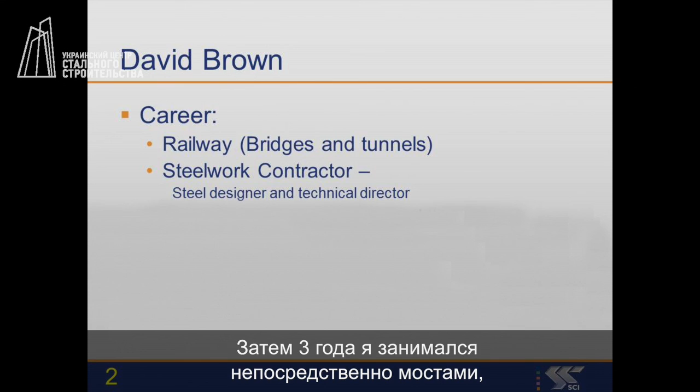So I started my career working for the National Railway Organisation in the UK. I designed a number of things, and then I spent 3 years on site working on bridges. After I worked on bridges for 3 years, I then looked after tunnels for a little while.

And then I met a man on a train, and he said he knew of a steelwork fabricator, and they wanted a design engineer. The steelwork fabricator was in a very horrible part of the United Kingdom. And I said, there is no way that I'm going to work in the steel industry, and there is no way that I'm going to work in this horrible part of the United Kingdom.

But then I thought, perhaps I'm being too hasty, so I went for the interview. When the managing director said, how much do you earn? I increased my salary, and he offered me even more. And then he said that we also give you a company car, and we also give you free petrol. So I left the railway and I joined a steel fabricator.

It was a very small company, and there was only me, so I did all the design, all the structural design, all the connection design. Then after 3 years, I was promoted to be their technical director, but there was still only me. So I did all the design, I did all the connection design. I did get a larger car.

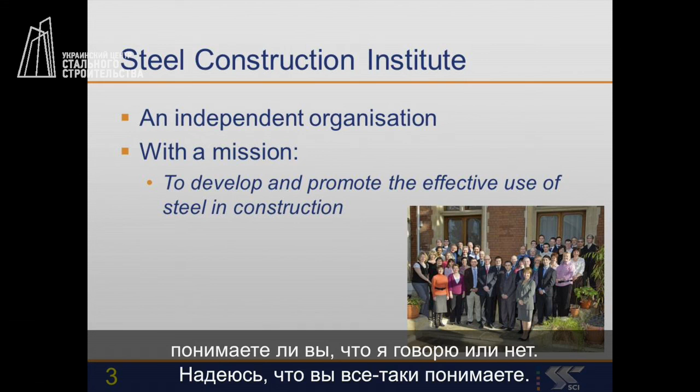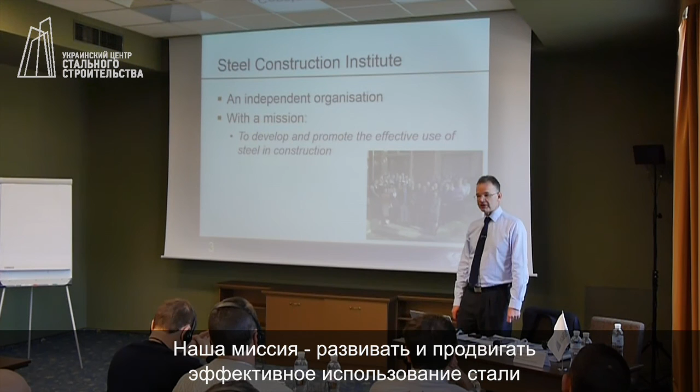There are about 30 people who work at the Steel Construction Institute. We have a mission to develop and promote the proper and effective use of steel in construction. So we write design guides, we train people, we answer their questions.

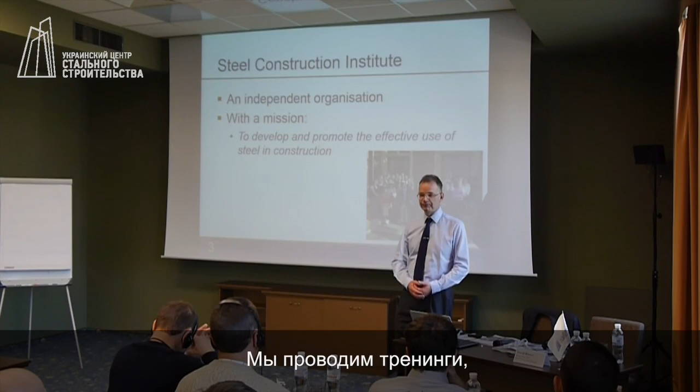We are an independent company, so we are not for profit. We don't try and make a profit, but we very definitely try and avoid a loss.

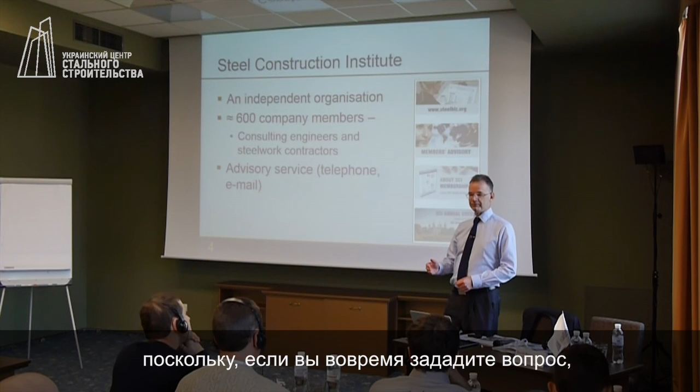We have around 600 members, and most of our members would be design engineers or steelwork fabricators. I think most people join us because of the publications they receive, but also because of the advisory service. When people have problems or questions, we help them out. People find that very valuable, because if you can avoid a problem, you might avoid a very expensive mistake later on.

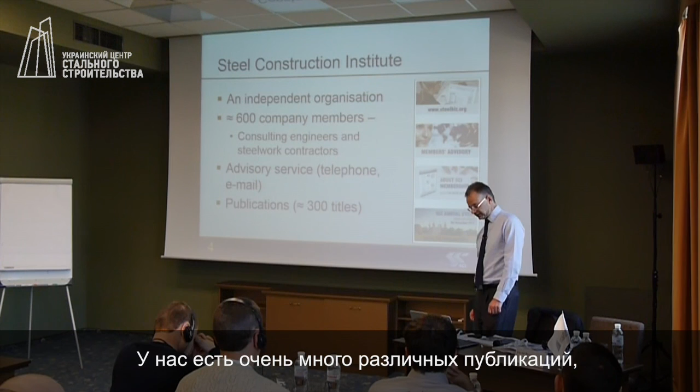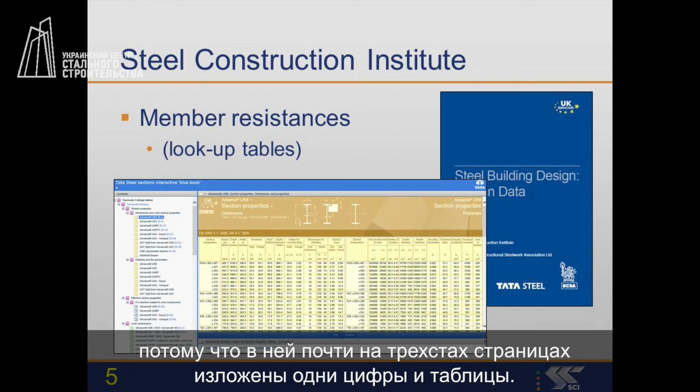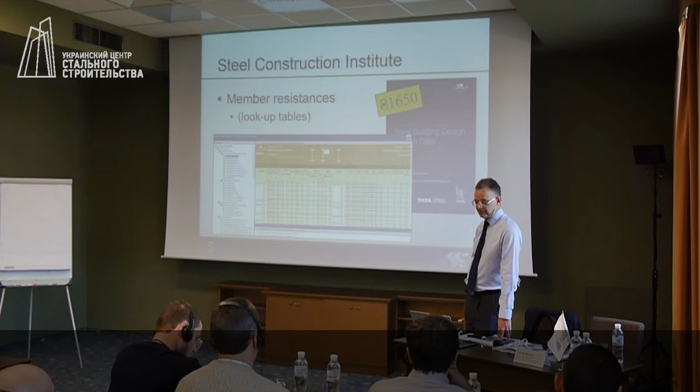We have lots and lots of publications, around about 300. Our best-selling book is what we call, for obvious reasons, the Blue Book. The Blue Book is really boring, approximately 300 pages, and it contains numbers, and even more numbers. These are lookup tables of member resistances, which is easy for us because we're using rolled sections, so standard sections. It's also our most expensive publication, and many people in the UK would have this particular publication. I feel slightly sorry for them because it's a really boring book.

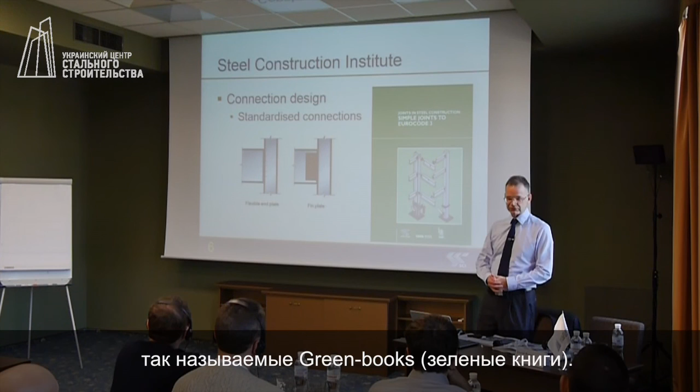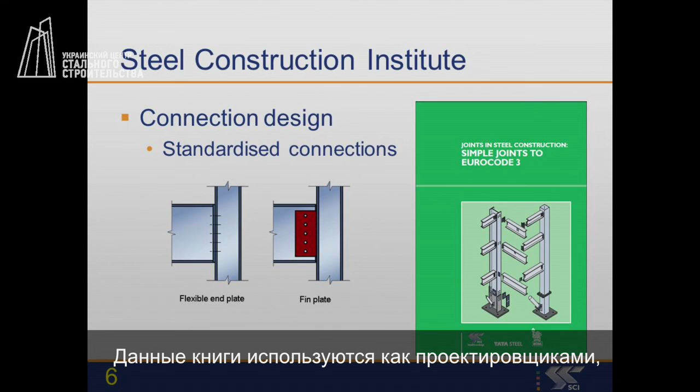We also do books on connections. Here is a picture of one of our green books, so nominally pinned connections in this case, end plates or fin plates. These would be used by practicing engineers, and also by steelwork fabricators.

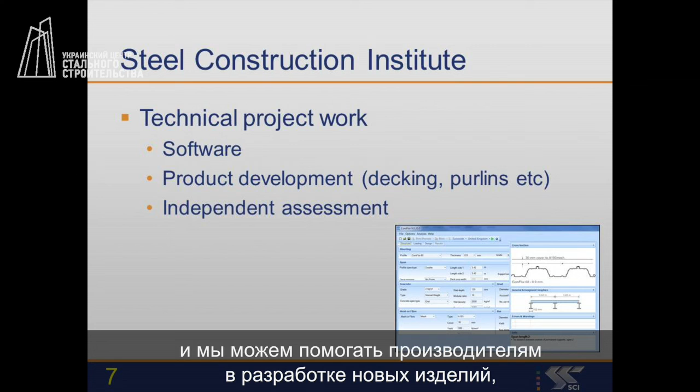We also do a lot of project work for different clients. So we write software, we might help manufacturers develop a new product, and we add a quality mark to some products.

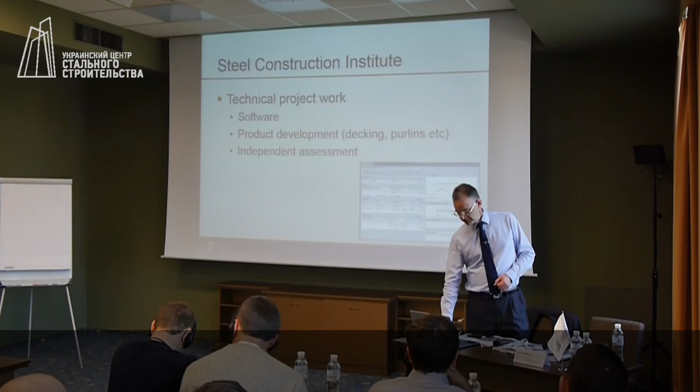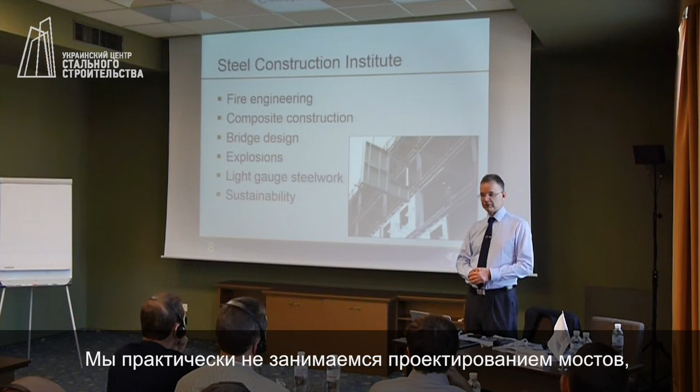These are some more areas where we work. Fire engineering, and I know fire engineering is important in Ukraine. Composite construction, so composite floors, would be the standard solution in the United Kingdom, so a lot of our work is to do with composite floors. We don't do much on bridge construction because there are not many new bridges in the UK. The UK is a small country, we don't have many new railways, we don't have many new major roads.

We deal a lot with explosions, and that would concern explosions really on offshore oil production platforms, which is a real hazard in that sort of environment.

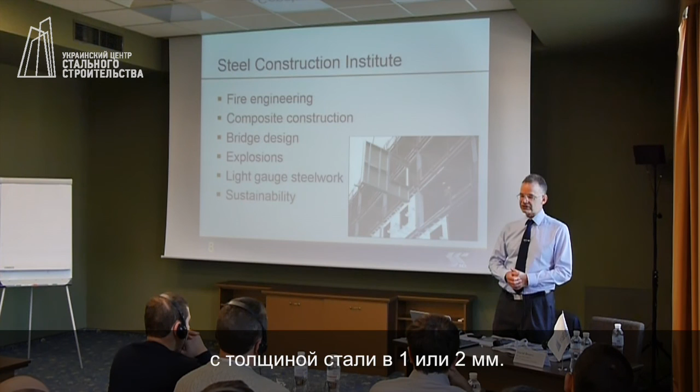We do a lot with light gauge steelwork. So light gauge steelwork would be 1 millimetre or 2 millimetres thick. It is very much a growing area in the United Kingdom, so maybe panels, as you see here, or maybe complete structures.

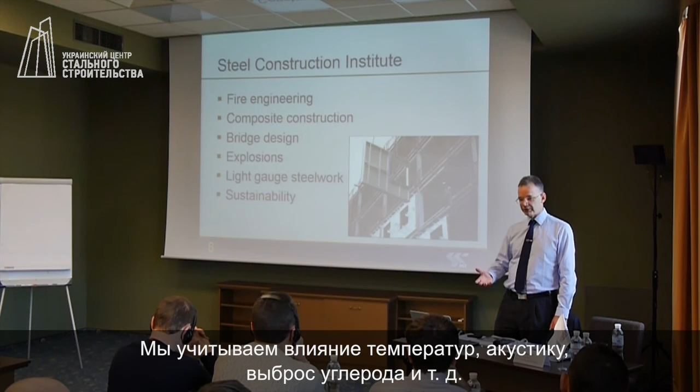And we do a fair amount in sustainability, so thermal performance, carbon, acoustics, those sorts of issues. So that's the SCI. Here then we're moving on to my technical area today, so a little bit of background on the Eurocodes.

So the Eurocodes then, the ambition was to have a set of design standards which could be used across Europe, across the entirety of Europe. And in the UK there has been a lot of resistance to the Eurocodes, because in the UK people would prefer to continue to design to their own standard. And they will ask me, what is the advantage of designing to the Eurocodes?

Are steel structures lighter? But the answer is that the Eurocodes were not developed in order to improve the technology. They were a political development so that one could trade entirely across Europe. I think that there are some improvements in technology, and I will try and demonstrate those to you later on.

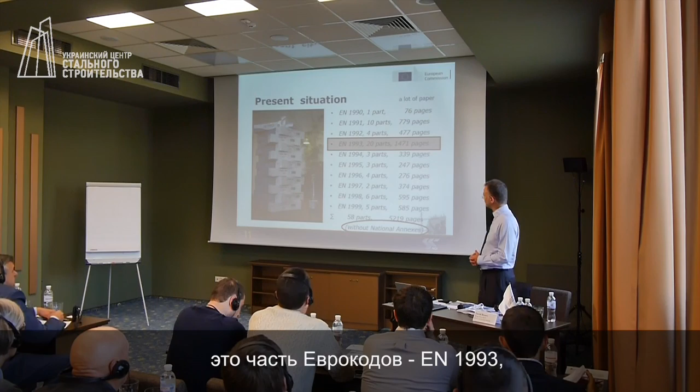One problem with the Eurocodes is that there are so many documents. Here is a slide which a European colleague put together, and you'll see down at the bottom here, 5,200 pages, which is huge. In the steel world, you will notice that the steel parts, EN 1993, are the largest contribution to the Eurocodes, with nearly 1,500 pages. So if you wanted all the Eurocodes, this is a large number of documents, and I would imagine it will be expensive. That's one of the problems that we face in the United Kingdom.

The second issue is that these pages are before you've got the national annex. So in addition to the Eurocode, every one of these parts, and you'll see that there are 58 identified there, they will all have a national annex.

Why do we need a national annex? Well, because the goal of a common design standard across the whole of Europe was not achieved.

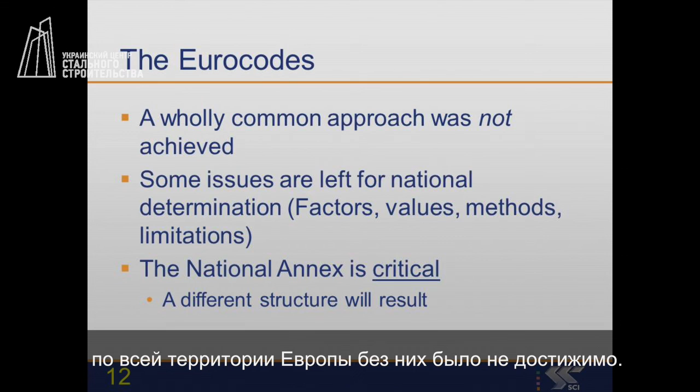The problem is, of course, that people in the United Kingdom think we know steel design, and we think we know it better than anybody else in the whole world. Unfortunately, people from Germany think they know steel design as well. They are wrong, of course.

But when there is a difference of opinion, what do you do? You debate for 30 years. Then you must decide: perhaps leave the issue out altogether and say nothing about it in the Eurocode, or perhaps make it a matter for national decision. And if it is a matter for national decision, then it will be part of the national annex.

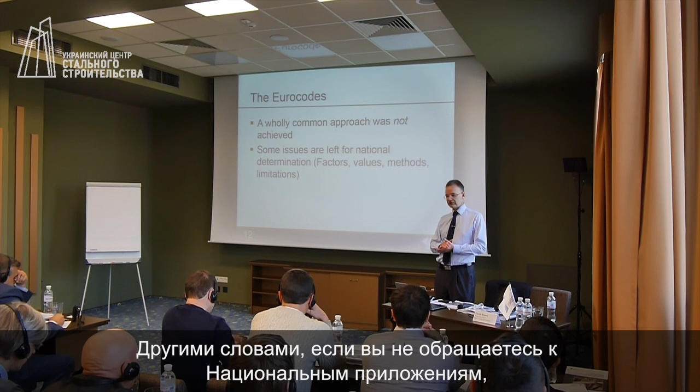So the national annex is really, really important, because it contains the things which a country feels very strongly about. If you do not pay attention to the national annex, you are in serious danger of making a huge mistake. I will try to emphasize that again a little bit later on.

In theory, the national annex is always to be made available in the language of the country, and in theory it's also to be made available in English. So you are supposed to be able to get the national annex for any particular country at least in English. I don't think that has been achieved throughout Europe.

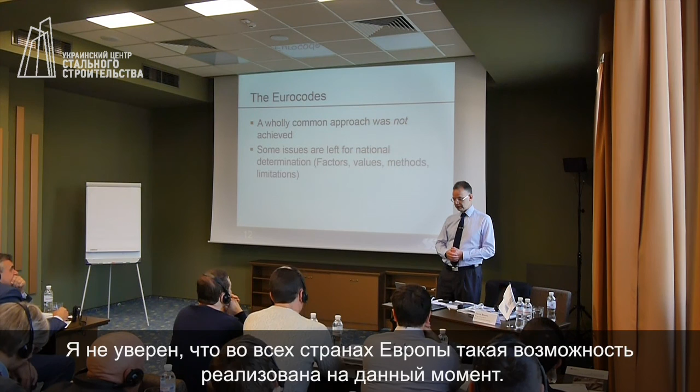You need to be aware of the national annex for the country where the structure is going to be built. For example, there would be nothing to stop you in Ukraine designing a structure to be built in the United Kingdom or in France. But if it was going to be built in the UK, you would need the UK national annex. So it's where the structure is to be built, not where you're designing.

So if you design to the Eurocodes, but in different countries, certainly a different structure will be the result, because some people feel very strongly about certain issues in the Eurocodes.

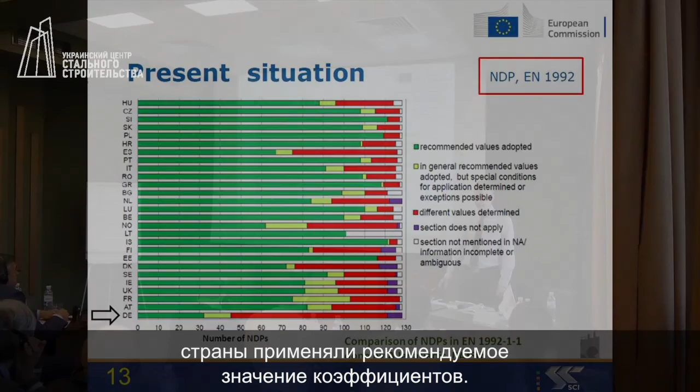This little chart, on the top right as you look, actually concerns the concrete code, not the steel code. But it gives you an idea of how some countries adopt the recommended values and how some countries change a lot. On this chart, green on the left-hand side represents where countries have accepted the recommended values in the Eurocodes, and red means a country has changed the recommended values. So the more red you see, the more changes there are in the national annex.

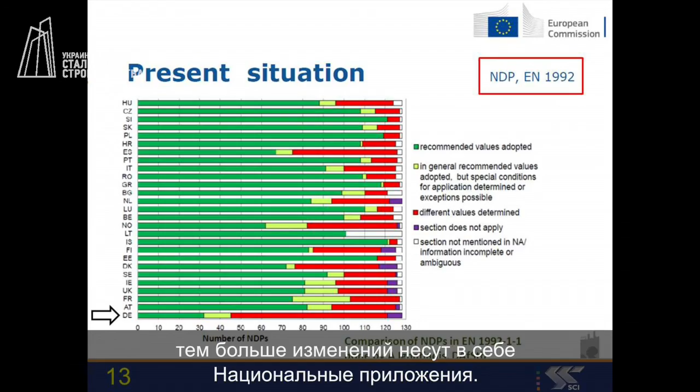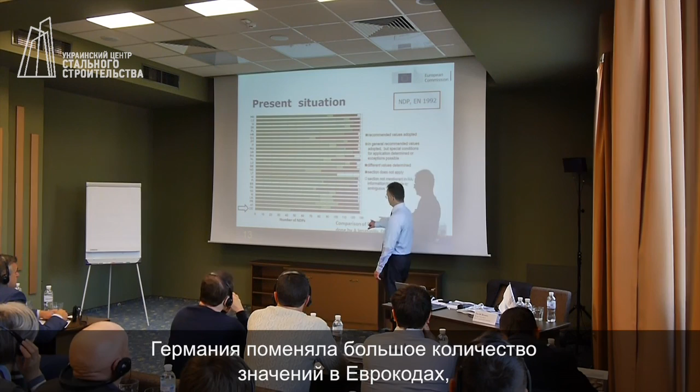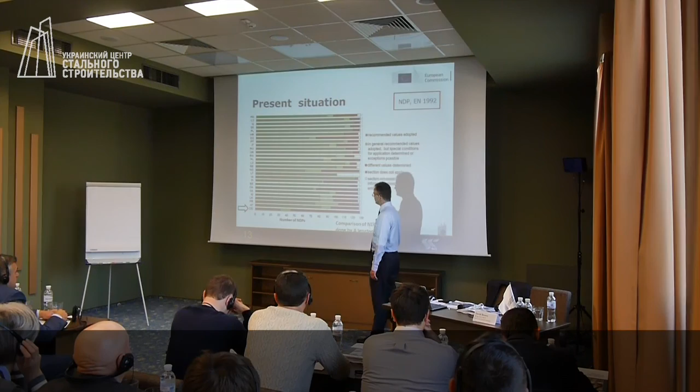Maybe not so much of a surprise, the bottom row there is Germany. Germany have changed an awful lot because they feel they know about steel construction. They are wrong, of course. The United Kingdom is here, so we think we know about steel construction too. I think this is Lithuania, and they seem to have accepted most of the recommended values. So it does change from country to country.

I received from the Steel Construction Centre here some of the Ukrainian national annexes, and I've had a look through them. In many places, it would appear that your national annex accepts the recommended values. In some places there are differences, and we'll look at some of those later on. But in many cases, important factors in the Eurocodes are accepted in the Ukraine national annex.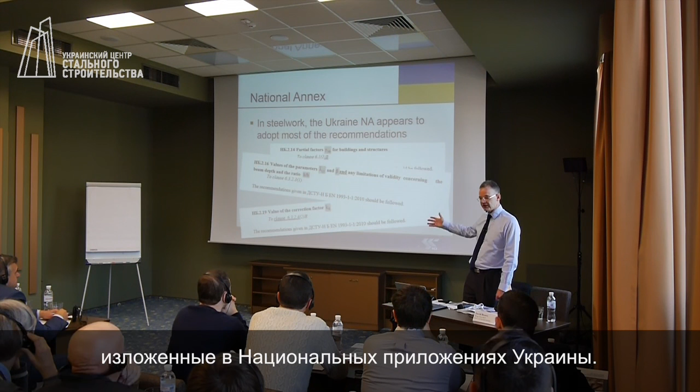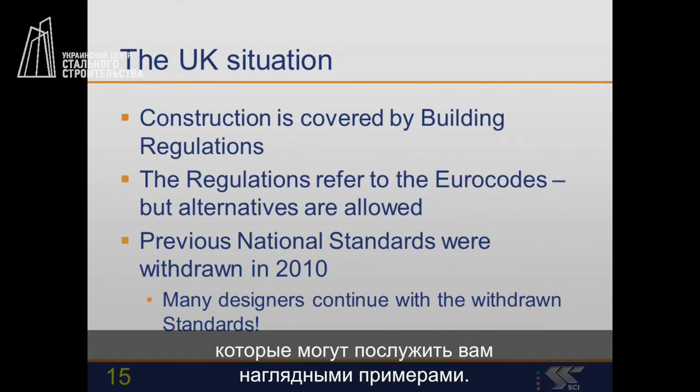Now, I don't wish to talk too much about the situation in the United Kingdom, and I will try to limit myself to situations where examples will help. In the United Kingdom, we are governed by something called the building regulations, and the building regulations do refer to the Eurocodes. But the regulations make it clear that design to the Eurocodes is only one way to satisfy the regulations.

In the United Kingdom, we could use the Spanish design standard, we could use the German design standard, we could use no design standard at all. So there is no obligation to actually design to the Eurocodes.

We do have a problem because our previous national standards were withdrawn 4 years ago now, so they are no longer available in the United Kingdom, and yet many people still use the previous national standards because they are allowed to under our building regulations. I think that will continue for many, many years.

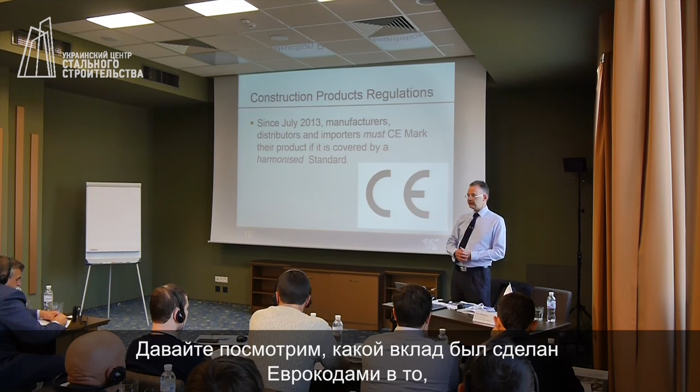One contribution to the Eurocodes is something called CE marking. CE marking is a quality stamp, effectively.

Materials must be CE marked, and fabricated steelwork must be CE marked. So anything which is placed on the market in Europe must be CE marked. Plate and sections provided by manufacturers will be CE marked, and certainly from summer of this year, fabricated steelwork must be CE marked.

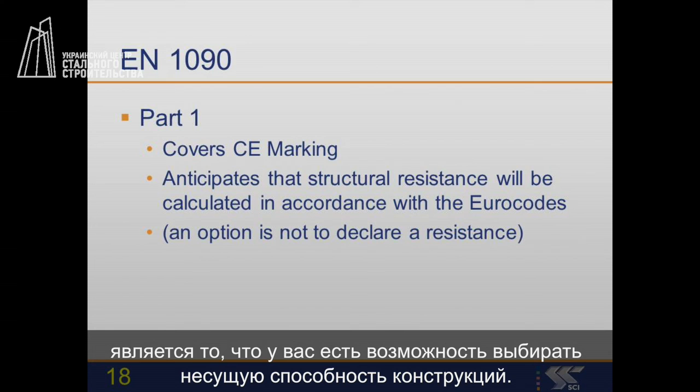CE marking is covered by European Standard 1090, and one of the options within that standard is that you can declare a design resistance. That means you will be saying a piece of steel is capable of carrying a certain number of kilonewtons.

If you do declare a design resistance, then 1090 is recommending that you calculate that resistance in accordance with the Eurocodes. So that means that if anybody is interested in CE marking, they will also be interested in design to the Eurocodes. Part 2 of that standard covers things like tolerances, workmanship.

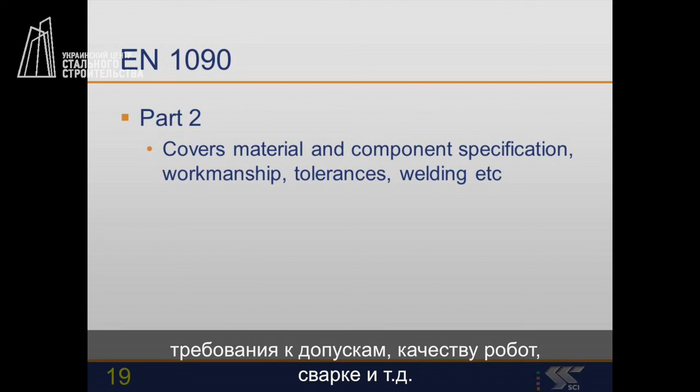In the UK, design to the Eurocodes is becoming more common. I think about 40% of designs in the UK will now be to the Eurocodes. Most of the larger steel designers, the large design practices, a famous name is Arup, an international practice, they will be designing to the Eurocodes. Many of the smaller practices will still continue with the previous national standards.

I think the change is happening because our national standards have been withdrawn. I think it's encouraged by CE marking, and encouraged because there is the option of a wider market. So in the UK, we could design buildings to be constructed in France or Germany or somewhere else in Europe.

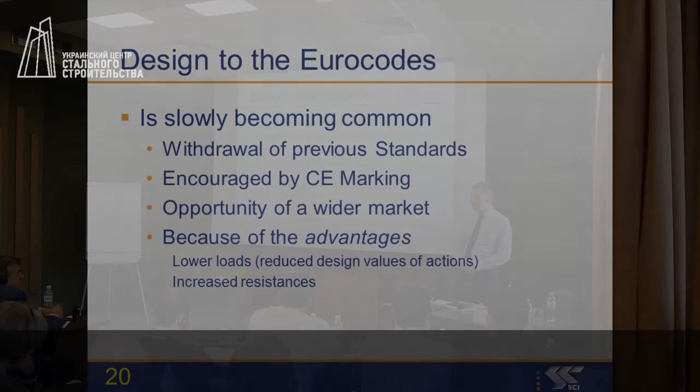Perhaps people are adopting the Eurocodes because of the advantages. So even though it was a political decision, I do think there are some advantages in designing to the Eurocodes. This may not be the same in Ukraine, but in the United Kingdom, we would be designing for lower loads, and therefore we could produce a more economical steel structure. Not only would we enjoy lower loads, we would also enjoy increased resistances. So the two, lower loads and increased resistances, make the Eurocodes very attractive for us in the UK.

Okay, let's move now to our technical subject, really, steel design. So a little bit of background.

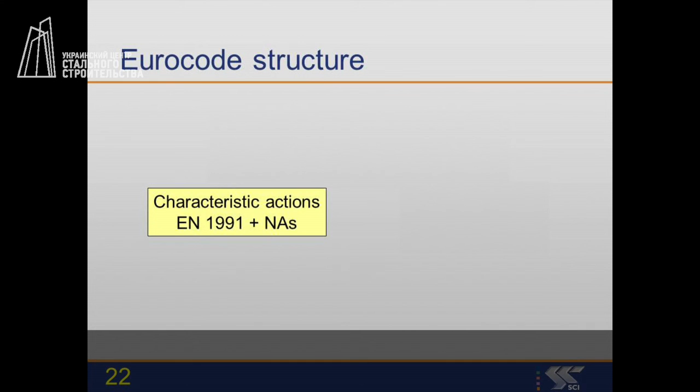This is a demonstration of the Eurocode structure. We have characteristic actions. I would have called those, in the UK, loads, but the Eurocode term is actions. They will come from somewhere in the 1991 suite of Eurocodes. There are a number of Eurocodes that all begin 1991. They cover things like snow and wind and loads on floors.

But notice, most importantly, you cannot look at these Eurocodes without the national annex, because the national annex is likely to change values, is likely to give you wind loads, for example, in your country. So you definitely need to look at the national annex.

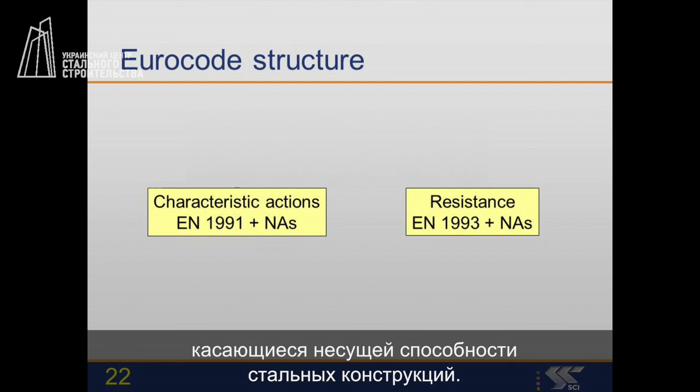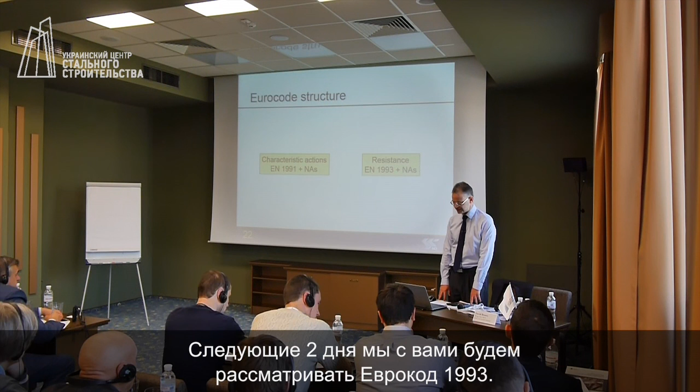And entirely separate to the actions is the resistance. For the next two days, we will be looking at Eurocode 3, or Eurocode 1993. But notice again, really importantly, we will always need to be looking at the national annex, because that will change country by country. And then those are brought together by a Eurocode called EN 1990.

And again, it involves the national annex. Your national annex has things to say about the content of EN 1990.

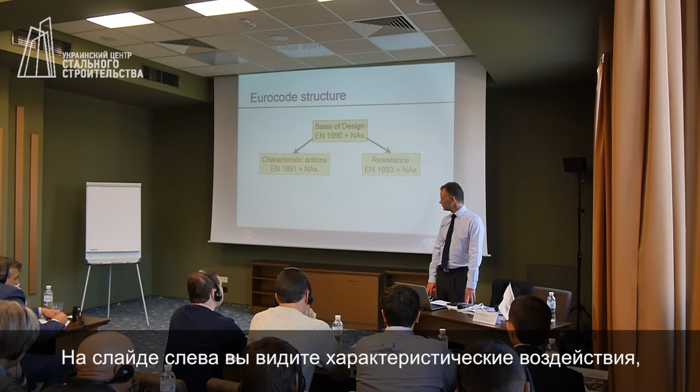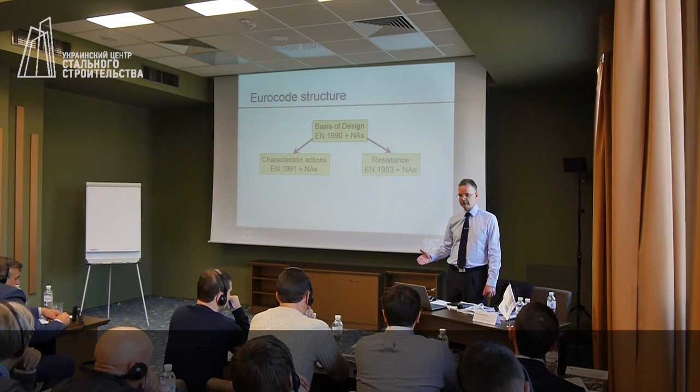So over on the left-hand side, a characteristic action will be typically something that happens once every 50 years. But when we compare that with a resistance, we want a factored action, or maybe you would know it as an ultimate load. So we need to combine the actions to create ultimate loads.

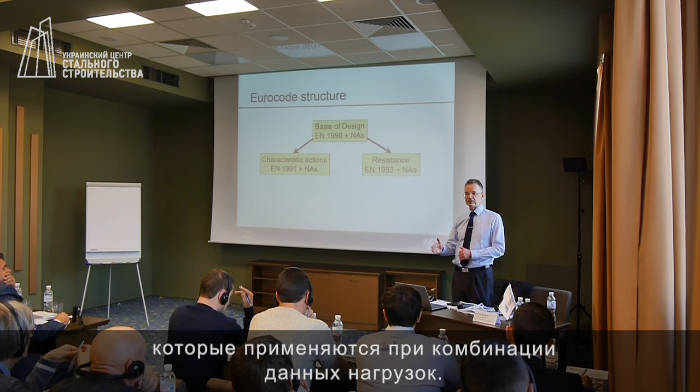And we find in Eurocode 1990 the factors that we apply to the characteristic actions. So 1990 is going to be a really important code for us, because it takes characteristic actions and then allows us to compare with our calculated resistance.

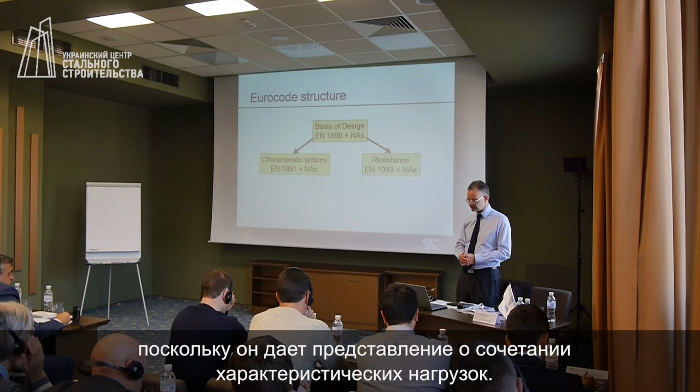These are the parts of 1991 that I think you will need most often. So the ones in bold type, I think, are the ones that you would use most of the time.

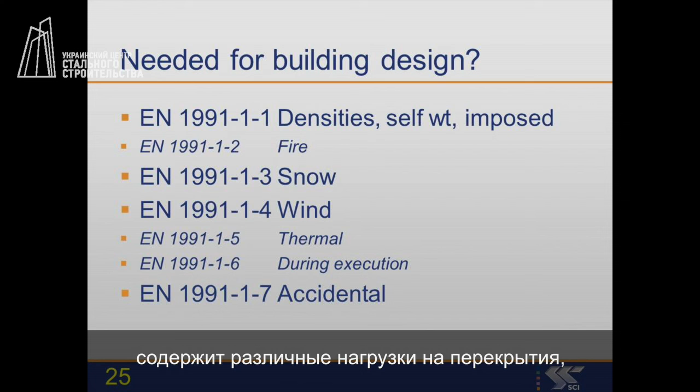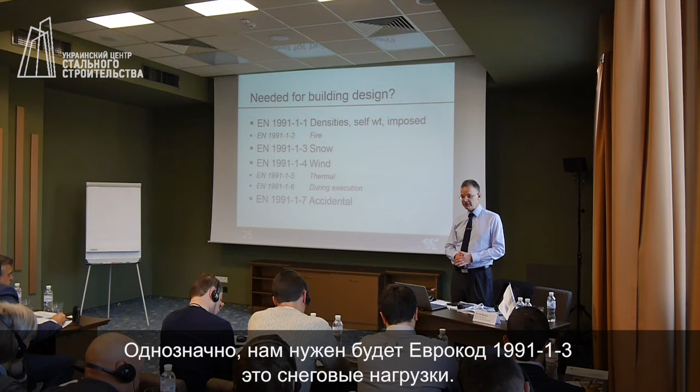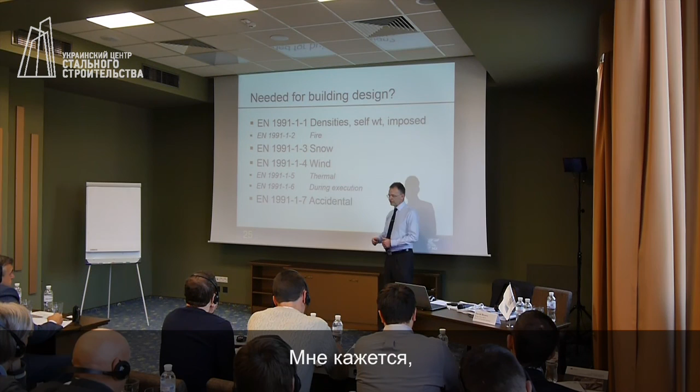1991-1-1, that's the top line. That will cover things like imposed loads on floors and imposed loads on roofs, so for sure we will need that. For sure we will need 1991-1-3, which covers snow. For sure we will need 1991-1-4, which covers wind. And I think you will need 1991-1-7, that covers accidental actions, but I would know that as robustness, or the avoidance of disproportionate collapse, or tying. I can see that one gentleman is content with that - I hope everybody else is.

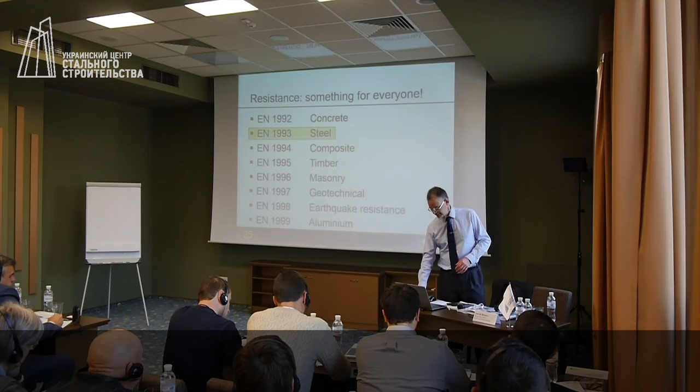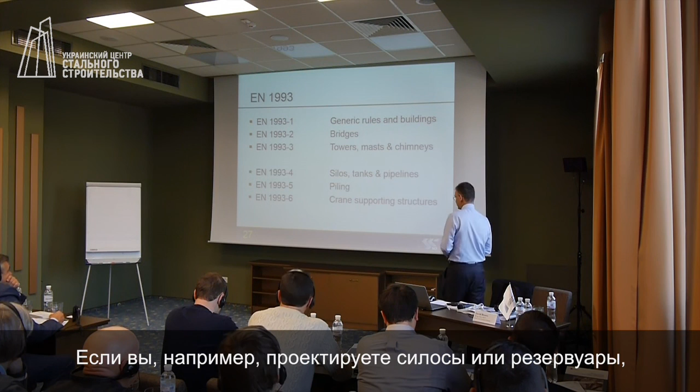Here is the full range of the Eurocodes. Today, of course, we are interested in 1993. So then 1993 splits into a number of parts, and here they are. The general objective of the Eurocodes is that repetition is avoided, so the most important part for us will be part 1, generic rules and rules for buildings. If you were interested, for example, in a silo, you would need part 4, but part 4 will only tell you the rules which are very specific to silos - it will continue to refer you back to 1993 part 1.

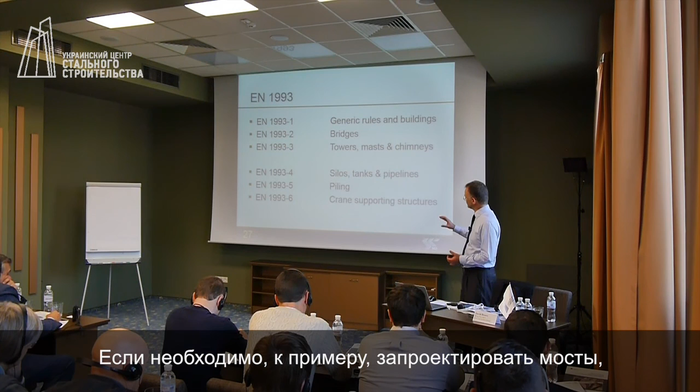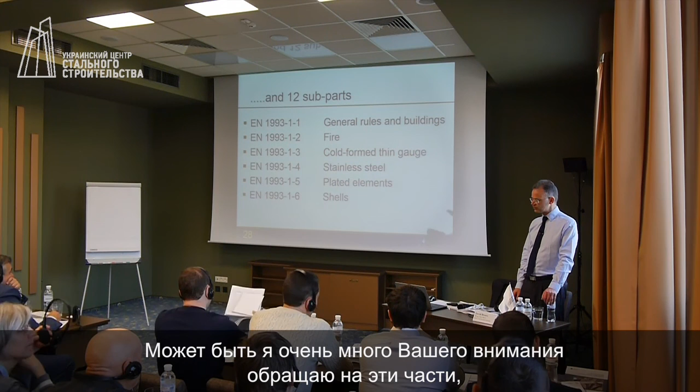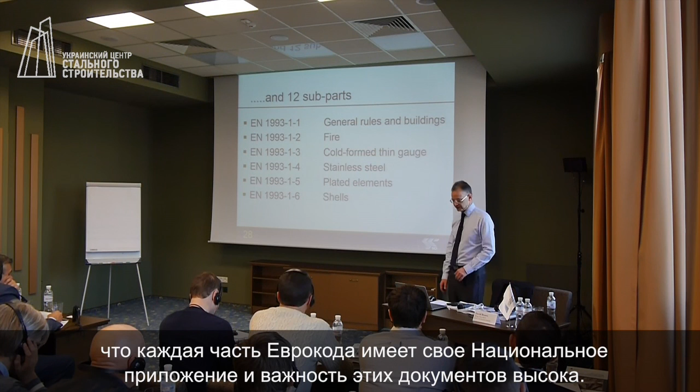So if you're designing a bridge, you would need part 2. But those parts tend to be thinner, have less content, because the bulk of the content will be in 1993 part 1. But then 1993 part 1 splits into 12 different subparts. And maybe I am emphasizing this too much, but each one of these subparts has a national annex. So the number of documents and the cost of these documents is increasing quite a lot. Some of these perhaps you will not be very interested in, because not many people do shells, for example.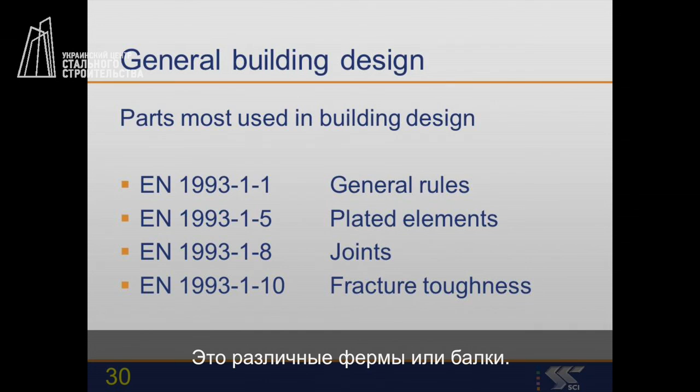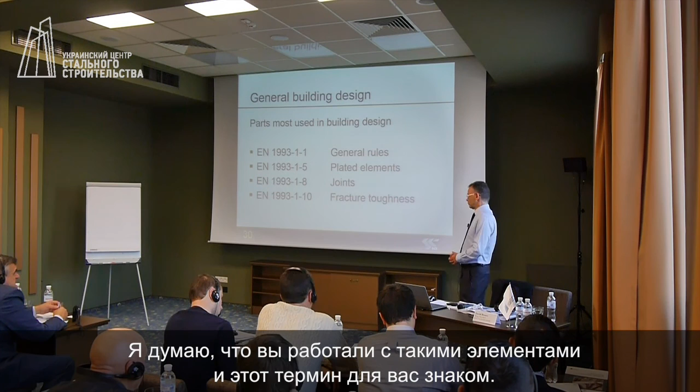1993-1-5 is described as plated elements, and you would perhaps think that would cover plate girders. Would that be a term that you would recognise, plate girders? I hope it's a term that you would recognise. So if you are fabricating a very large girder out of 3 plates, that's what I would describe as a plate girder. They would tend to be used in bridges rather than buildings. The reason why, therefore, I put this document as a recommended document is that if you are checking a small section for a concentrated load...

So if we have a column perhaps and a beam coming in here, we would worry about the resistance of the web in crushing or in buckling. Are you happy with that? I shall draw something.

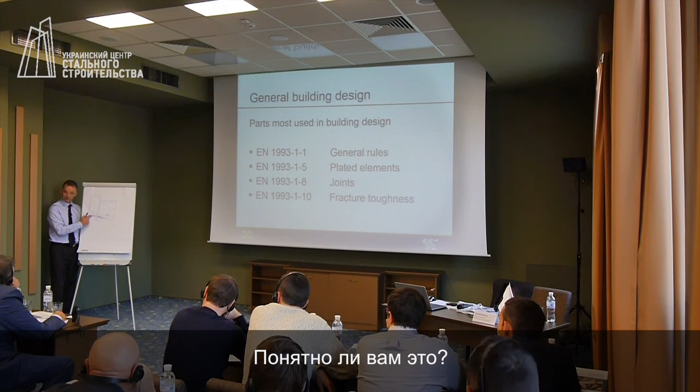So this might be a column in a building, and this might be a beam which has been welded to the column. And maybe there is a bending moment on this beam, and therefore we know that there is a very large compression in the bottom flange. We are concerned about the web of the column, because maybe it will crush locally, or maybe it will buckle between the 2 flanges. So in design standards, there is always a check to see whether you need to put a stiffener at that location. Does that make sense? Excellent, I can see a number of people nodding, which is good.

You could be listening to the radio as far as I know.

So, although we are not really covering bridge girders today, that's why we would be interested in plated elements, so that we can check the resistance of a web.

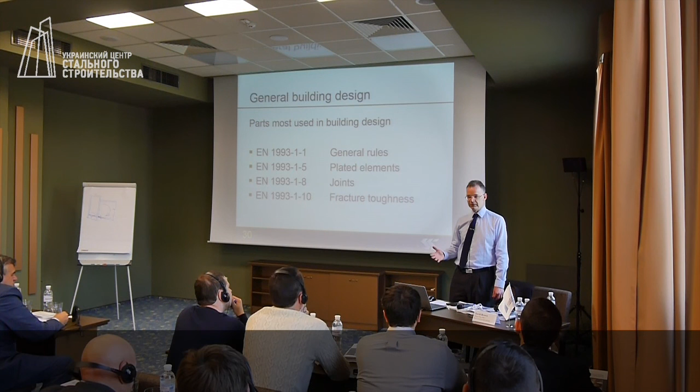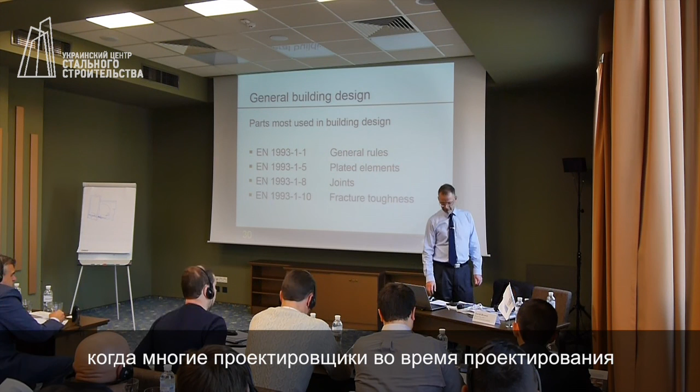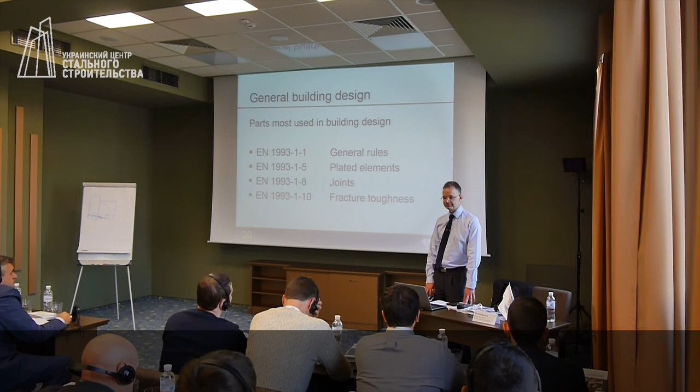We will be looking at joints, or I would describe those as connections, and we will be looking at 1993-1-10 because that covers the important choice of a steel subgrade. So as designers, you should not just be interested in the strength of steel, you must be interested in the subgrade as well. This is quite a key issue in the UK because many steel designers who work for design practices do not specify the steel subgrade. And therefore, if I was working for a steelwork fabricator, I would give them the cheapest possible steel I can find. That may not be adequate in some circumstances, so we will look later on at this choice of steel subgrade.

So problems, ladies and gentlemen, because even if you limit yourselves to just a small number of standards, there are a lot of documents that you need. You also need the National Annex, so many, many documents, and I guess that will cost you. Sometimes even the combination of the Eurocode and the National Annex does not tell you everything that you need to know.

Because in some countries they feel that certain values, your undergraduate education should teach you how to calculate. They consider them to be basic values, and therefore think there is no need to provide them in the Eurocode. In some countries, for example Great Britain, we have no idea what they are talking about.

So it's not in the Eurocode, not in the National Annex, so you need to refer to what's known as non-contradictory complementary information. That is a Eurocode term, NCCI, and that would be advice and helpful information to cover the things that the Eurocode or the National Annex does not tell you.

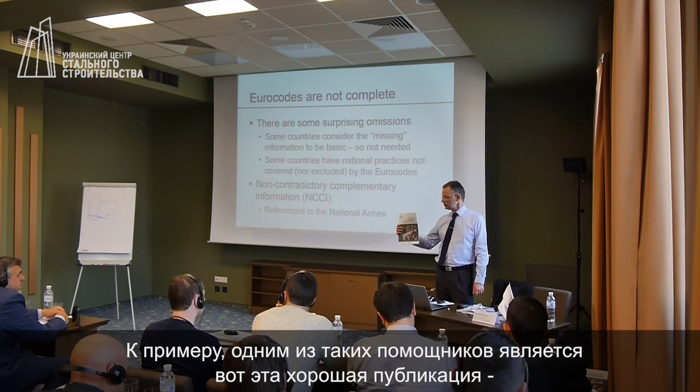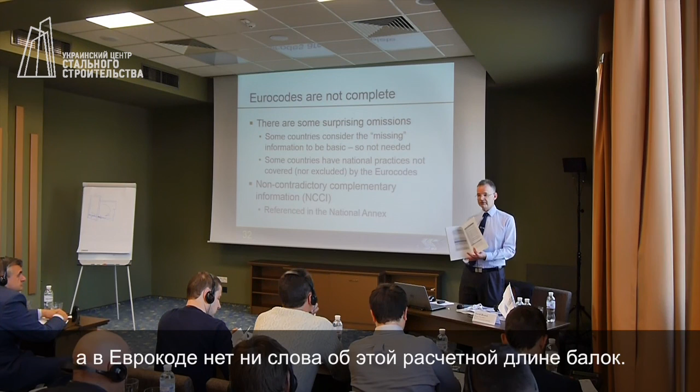So the sort of advice that you get in good documents like this, you would consider to be NCCI. When there are things you don't know or when the Eurocode is silent on something, for example, I look in the back of this publication, on page 94 and 95, and it tells me about effective lengths of beams. Well, the Eurocode doesn't say anything about effective lengths. So if you're interested in effective lengths, for example, you would look on those pages.

In the UK, we have a website which captures lots of NCCI. I look after the website, but this particular site is free for everybody to use, by the way. It contains lots of helpful guidance that people will need if they are designing to the Eurocodes.

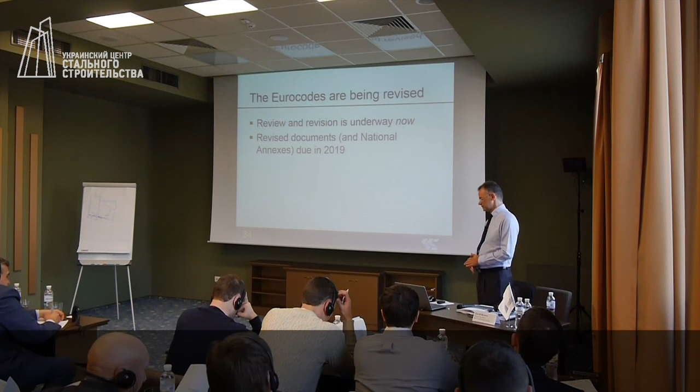Now you think, perhaps, ladies and gentlemen, that the Eurocodes are rather new to you. Unfortunately, already the Eurocodes are being revised. They hope to have revised Eurocodes available in 2019 or 2020. So already there is significant work going on in changing the Eurocodes.

So finally from me then, this course today. It's different for me because I come from a country where a multi-storey frame, 70% of multi-storey frames will be steel. They will all have composite floor construction. If it were an industrial structure, 98% would be steel. So steel is the standard solution, if you like, in the United Kingdom.

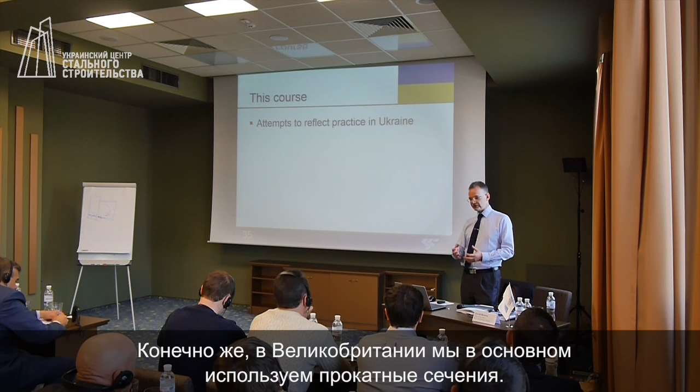And of course, in the United Kingdom, we use rolled sections all the time, universal beams and universal columns. So I've tried to change the material within this course to suit what happens in the Ukraine. I've tried where I can to follow the National Annex, and I will try and point out some of the contents of the National Annex.

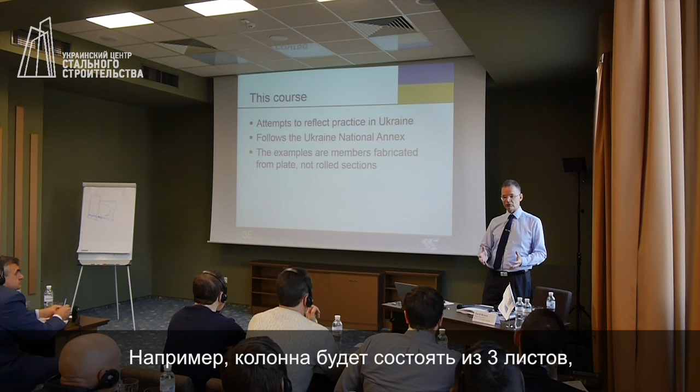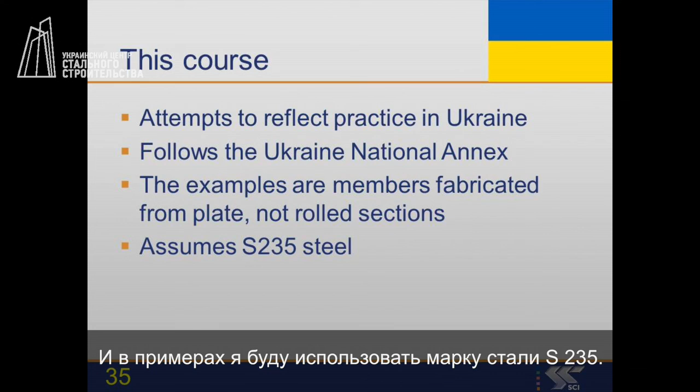And the examples that we will be using today and tomorrow are all members fabricated from plate, because I understand that here in the Ukraine, you tend to fabricate your beams and your columns from 3 plates, rather than use rolled sections. And the basic grade that my examples follow today will be S235.

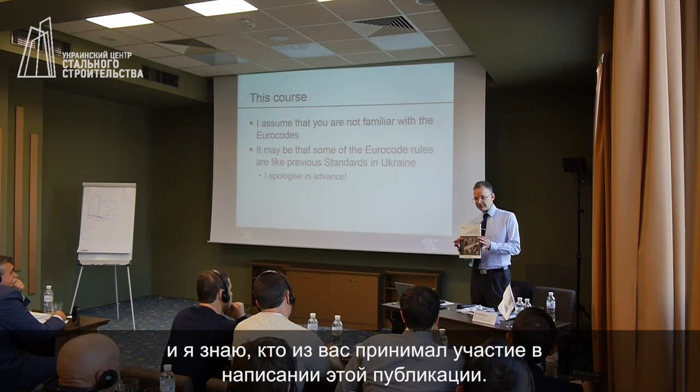So, as I continue now, I think I have to assume that you're not familiar with the Eurocodes. I know 1 or 2 people in the audience may well be very familiar with the Eurocodes. I know there are some people who probably were involved with writing the National Annex, and at least 1 person who reviewed this document. So there will be some people who know the Eurocodes very well indeed.

If you are familiar with the Eurocodes, I apologise in advance because I will be telling you things that you know. So what are we going to do? We're going to do some lectures. I have some numerical examples for you to complete, so I hope you've brought your calculators. You will get a complete answer at the end of today and at the end of tomorrow. So if you don't manage to work your way through the numerical examples, you will have a completed worked example to take home.

My view is that if you ask me a question, then if it's easy, I will try and answer it. If it's difficult, I will pretend that I don't understand the question.